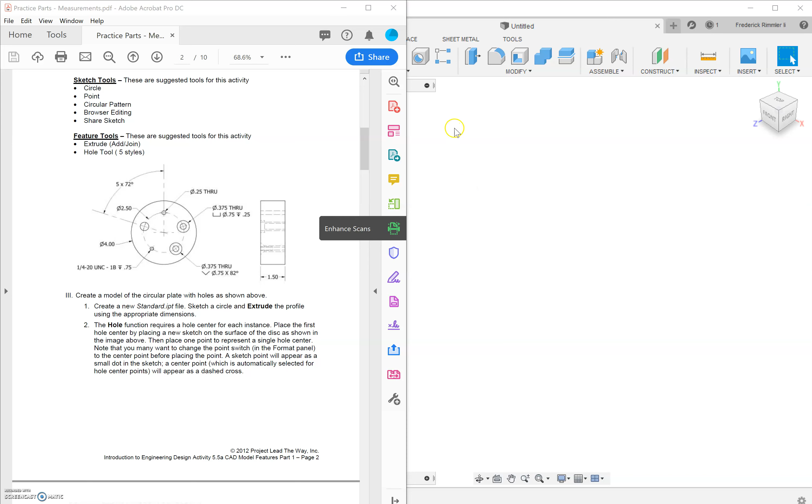All right, today we're going to make our first two parts that use the circular pattern tool. The first of which is this part that we will call 5 holes that uses 5 holes along a circular pattern. The first thing we need to do, as always, is create our new component.

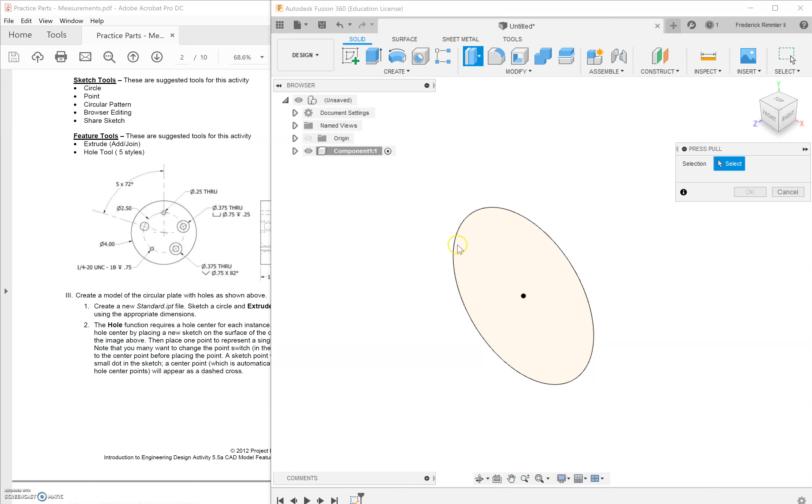Now we just need a metal disc to drill these holes into. So I'm going to start a new sketch, use our circle tool, and make a 4-inch diameter circle. I'll finish sketch, and press pull this guy, make him 1.5 inches thick.

Now the next thing we need to do is add points to mark off where we want our holes to go. So I'm going to create a sketch on top of this disc, and if I click the arrow next to create, I can go down and select point. This allows me to mark off locations.

I'm going to put one straight up from my origin, and then dimension that point 1.25 inches out. The circle, if you look here on the left, has a 2.5 inch diameter. Since we are measuring the radius from the middle, it will just be half that.

Now, rather than draw all 5 points and try to line them up perfectly, we can use a new tool in the Create panel called Circular Pattern.

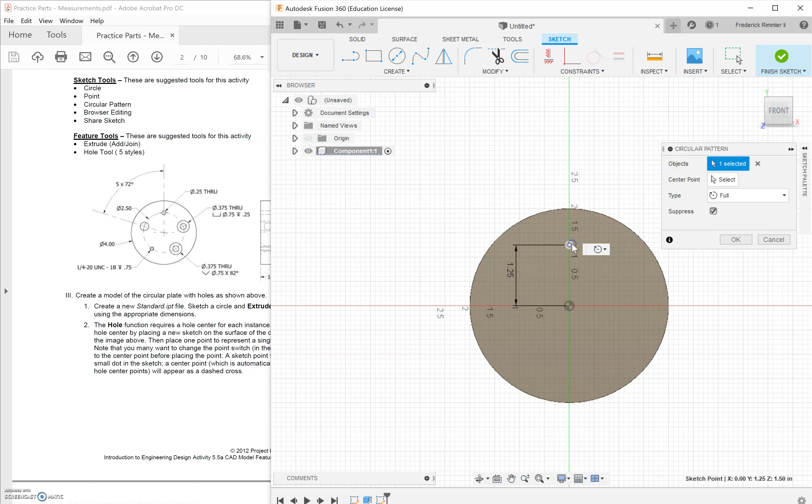With Circular Pattern, I can select the object I want to pattern. In this case, I'll click the point. You can see it says one selected. Now I'll click center point and click my origin, which will be the middle of that circle. And you can see it's created 3 of them by default.

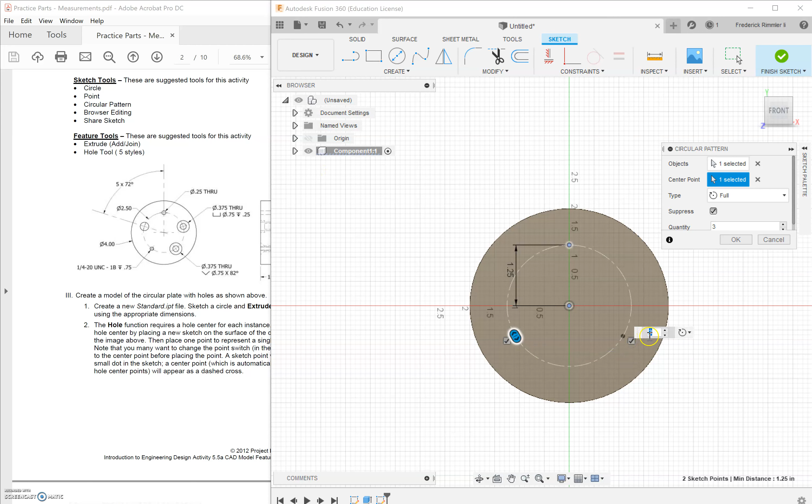I could create 3, I could create 30. I could even go through and check and uncheck specific points to turn them on and off. In this case, I just want 5 points, and I'll click OK.

Now I can finish sketch and come up here to use the hole tool. The hole tool is used whenever we want to make a hole designed for a screw to fit in.

If you're just making a standard circular hole or rectangular hole, I recommend just starting a new sketch, drawing the shape, and press pulling it through. But if you're making a hole specifically designed to fit a screw, then you're probably going to want to use the hole tool. So I'll click the hole tool.

The first thing I need to do is select my point for my first hole. And now you can see I've got a whole bunch of options here. The options over here on the left should sync up relatively well here on the right, although they're a little bit rearranged. For instance, here it's referred to as termination.

Over here we have extents, and that's how deep this hole goes. For our first hole, our termination is through all, so I'm going to change our extent to all. We've got a simple hole, which is that first symbol here. We have simple hole tap, which just means nice smooth sides, which is that symbol here.

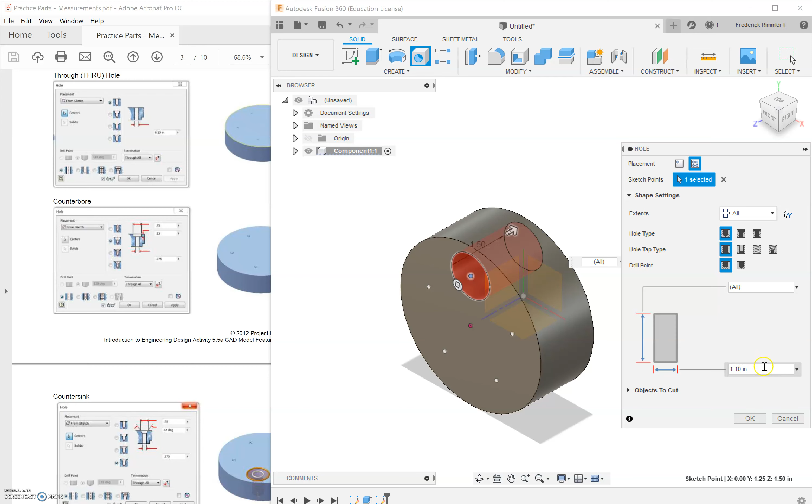And that's it. Time to make hole number 2. But before we can make hole number 2, we have to bring back those 5 dots. So in order to bring back those 5 dots, I'm going to come here to my browser, click the arrow next to component, and I can find my sketches down here.

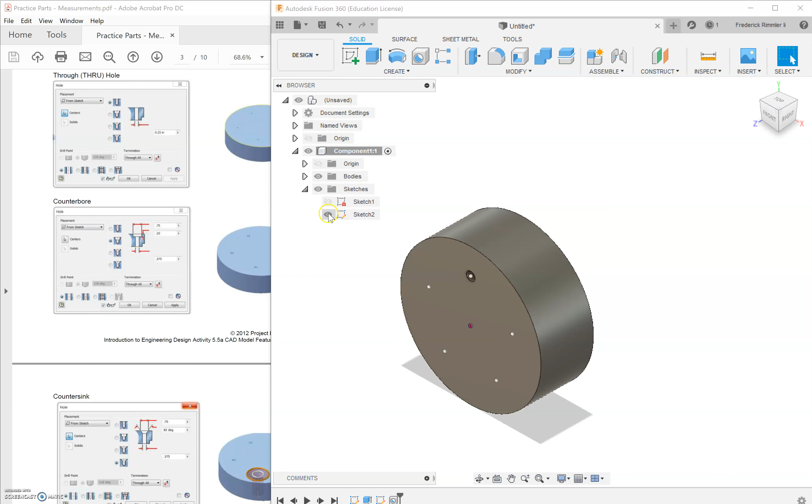Fusion 360 operates on a one and done mentality. If you make a sketch and use the sketch, it automatically hides the sketch, figuring you're done with it. But we can go back and just click this little eye next to sketch 2, and that will bring back the sketch with those 5 points.

I'll click hole and pick my second point. Now if we look at our second hole, that's a counter bore hole. Our termination is through all, so I'm going to change my extent to all.

For hole type, I'm going to pick the second one, counter bore. A counter bore hole has a wider top to the hole. It's designed so that when you're screwing in a button head screw, a nut, a bolt, it can be recessed down into the part, giving you a nice smooth surface.

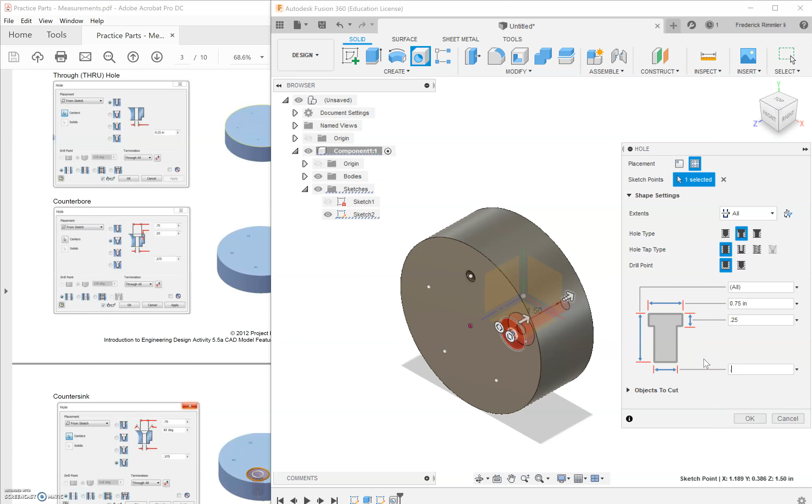My counterbore width is 0.75, counterbore depth 0.25. So 0.75 and 0.25. And then my hole diameter, 0.375. Click OK. And you can see this counterbore hole gets wider at the top in order to accommodate a nut, a bolt, a screw head.

For our third hole, we're going to do a countersink hole. A countersink hole is very similar to a counterbore hole, except instead of a rectangular top, it has an angled top designed to hold screw heads.

Again, the objective behind it is so that the screws will go down into the part, leaving a nice smooth surface. We can see our termination is through all. Our hole type will be countersink. Simple hole tap, flat drill point.

We can see up top our countersink diameter is 0.75 inches. Our countersink angle is 82 degrees, and our hole diameter is 0.375 inches.

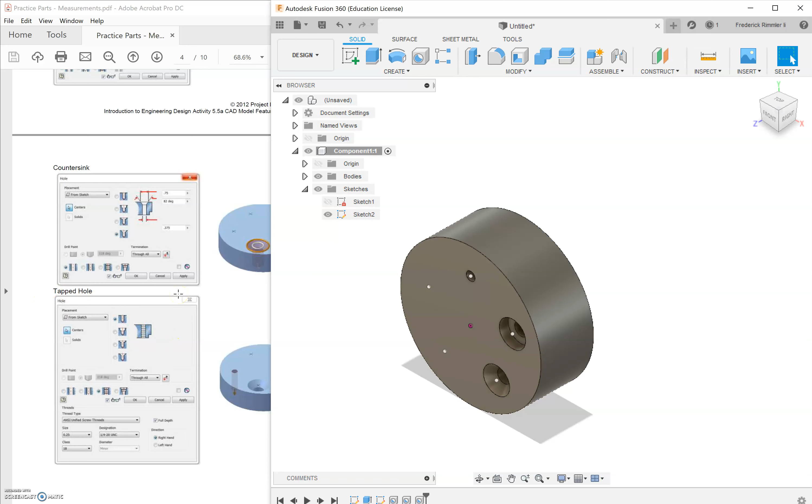Our fourth hole is a tapped hole. A tapped hole is designed to have threads cut into it so that you can screw a bolt or a screw directly into the part.

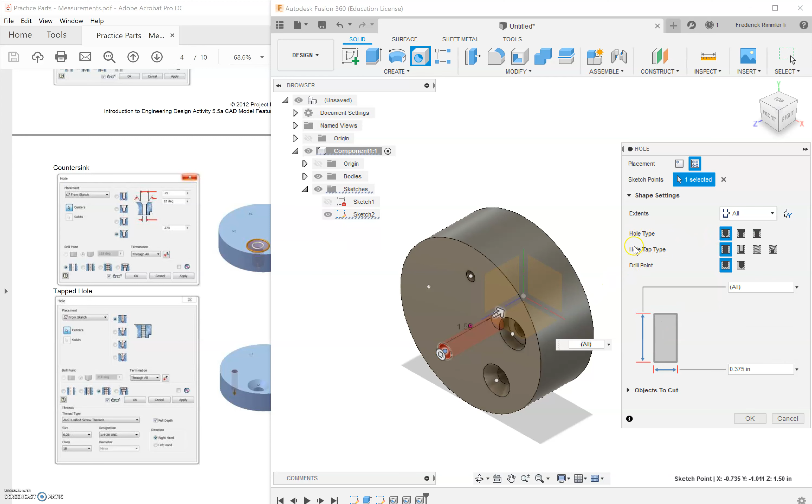So I'm going to go to hole. Looks like my termination is through all again, and I'll pick my point. Hole type, I'm going to go back just to a simple hole, but now where it says hole tap type, I'm going to click the third one, tapped.

Now I can come down here, and what we want to do is match the screw settings. Fusion 360 has a content library with thousands of different types of nuts, bolts, and screws. All you have to do is pick the specific screw you want, and it'll automatically pull the measurements. So we've got ANSI unified screw threads. Our size is 0.25.

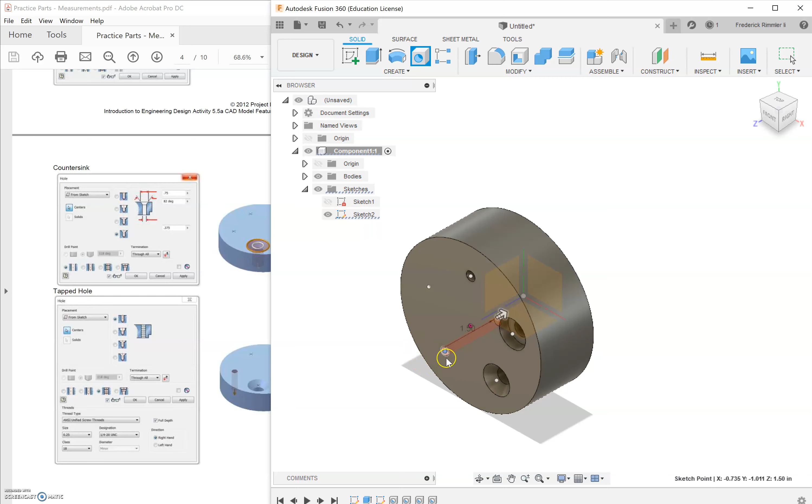Designation, 1/4 inch 20 UNC. Class 1B, and right-handed. Now, if I click OK, it will pull up that information, and you can see right now it just draws a spiral on the inside so that we know that it's threaded.

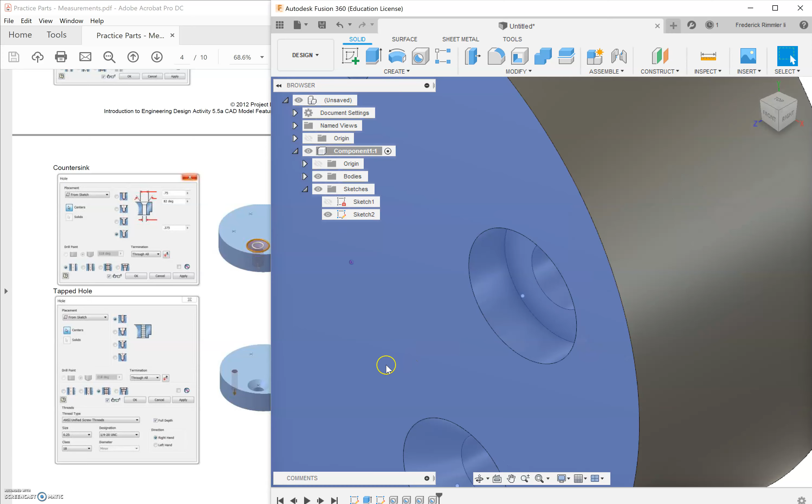You also have the option of clicking modeled, and now instead of drawing that, it will actually carve the threads into the model. This would be useful if you're going to 3D print this part, in which case it would 3D print the threads as opposed to just showing the threads.

Our final hole is a clearance hole. This is a larger hole designed to fit a screw head when two parts will be connected together, or you have to screw one part through another part.

So I'm going to click hole, click my fifth point, termination through all, simple hole type, except now we want a clearance hole tap type. And again, all we have to do is pick what size screw or what size bolt we want it to be able to fit. In this case, we want ANSI unified screw threads.

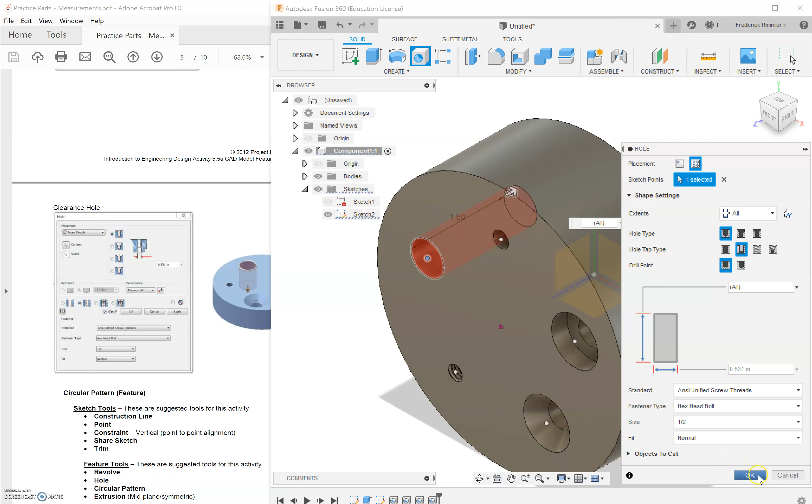We want a hex head bolt. Our size is 1/2 inch, and our fit is normal. Click OK, and now we have our clearance hole.

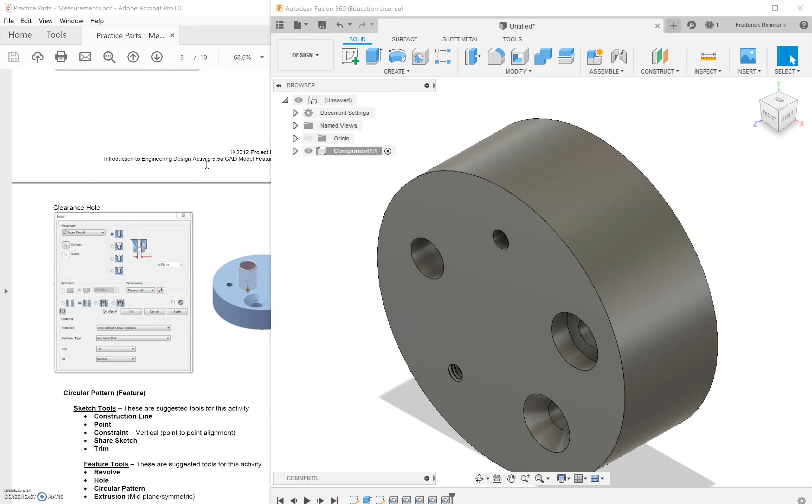The final thing to do on this sketch, now that we are done with our 5 points, I'm going to come to Sketch 2 in the browser and click the eyeball to turn that sketch's visibility back off. And that is the 5 holes part.

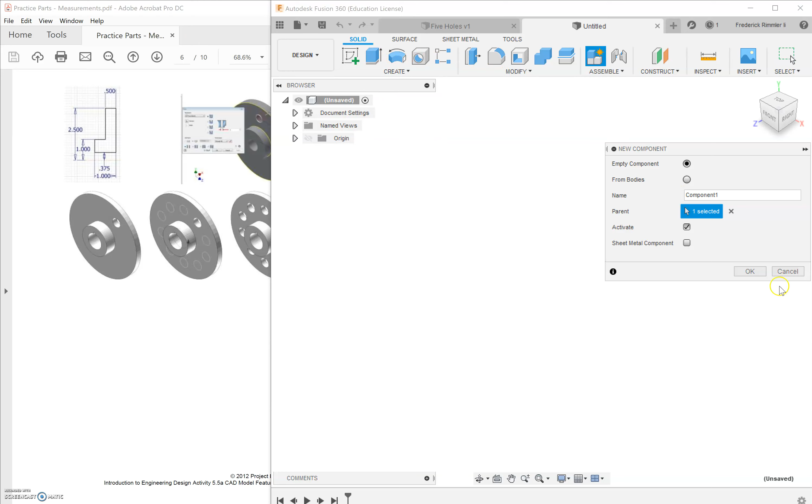The next part we're going to make is a nice quick one, and that is this disc brake right here. It too uses circular pattern, but it also incorporates revolve. So I'm going to create my new component, create a sketch. Now the interesting thing with this sketch is we don't start at the origin.

I'm going to draw my shape floating up into the air here. The reason for that is when we want a circle, we want a hole right in the middle. So this way, when we revolve the shape, it'll also leave that gap there for us.

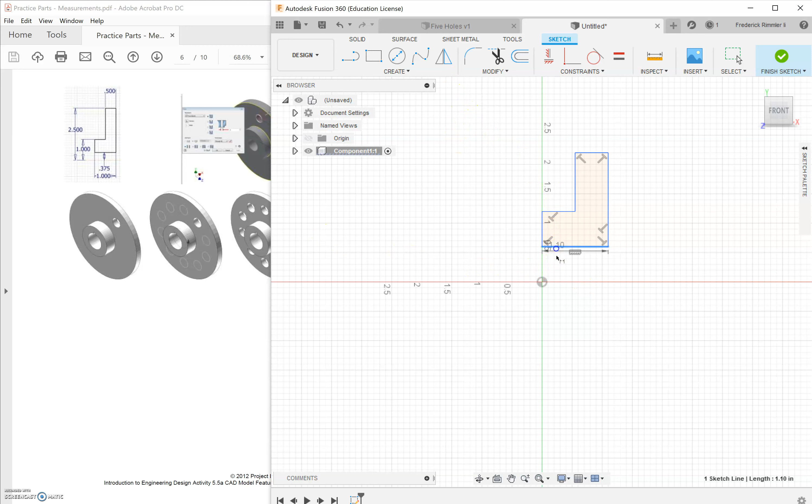When we come to dimension, looking at that sketch, we can see that all of our heights are measured from the origin itself. So origin to this line is 1 inch, origin to the top, 2.5 inches. We've got a width of 1 inch, and then our upper width is 0.5 inches.

Now you can see my part is still blue. That's because it can still slide back and forth because we didn't start at the origin. So what I'm going to do is come up to my constraints and use a vertical constraint and say that this point and my origin have to line up straight up and down.

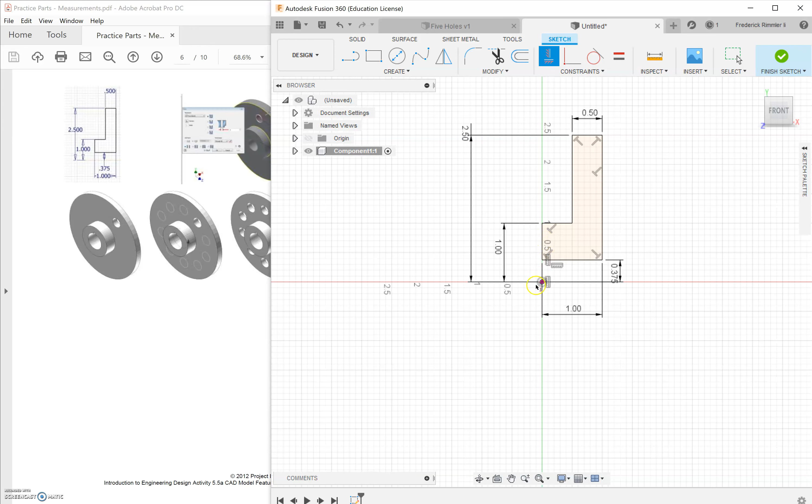Now I can finish, go to revolve, and I'm going to pick this axis. And you can see as I revolve it, it automatically revolves that hole in the middle as well.

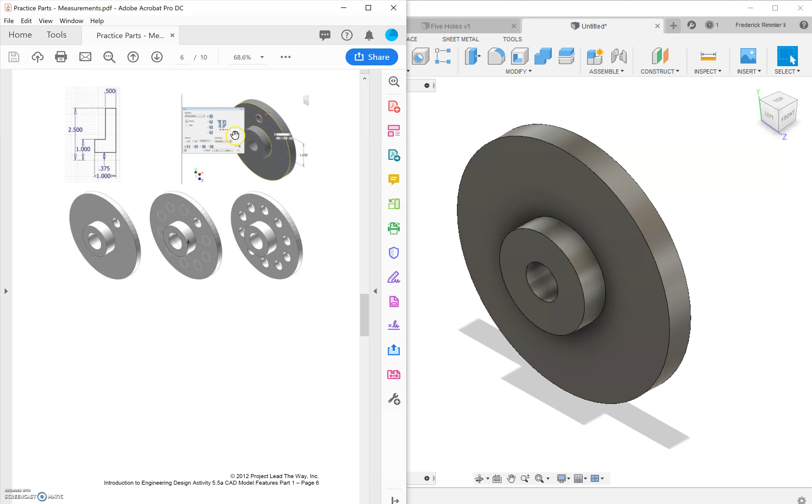Now we need to add these circles here. It's kind of hard to see, but the distance from the center is 1.65 inches, and we're going to go with a 1/2 inch diameter for the hole.

So I'm going to create a new sketch on top, and I'm just going to put a point that I'll dimension 1.65 inches out. Now we could finish sketch and use the hole tool, but since this hole is just a simple circle, I'm just going to sketch a circle right onto that point. 0.5 inch diameter circle.

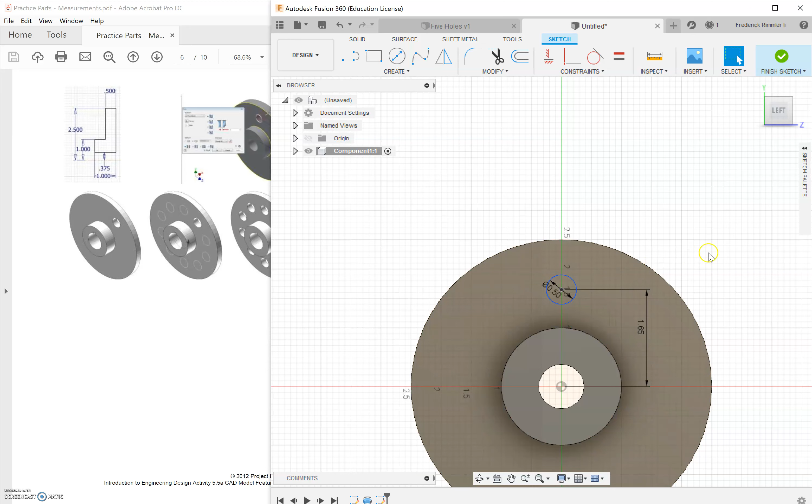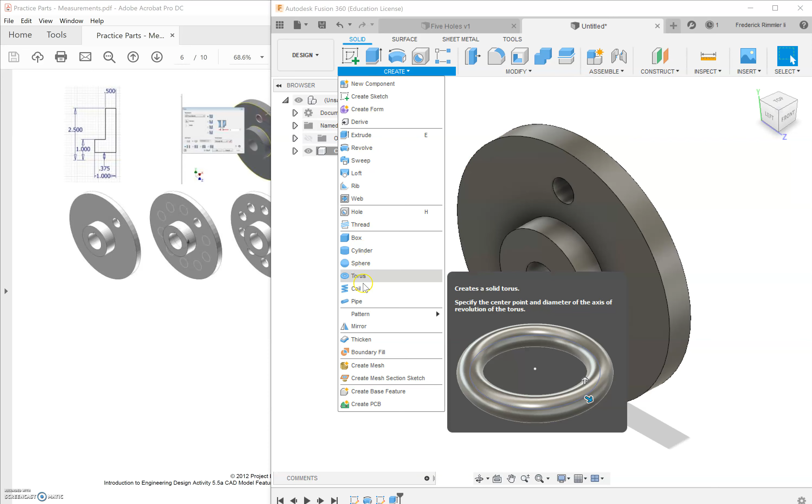Finish, and I will press pull this guy through the bottom. Now, to create all 10 of these circles, just like with the points on the 5 holes project, I'm going to click create. I'm going to come down here to pattern, and I'm going to pick circular pattern.

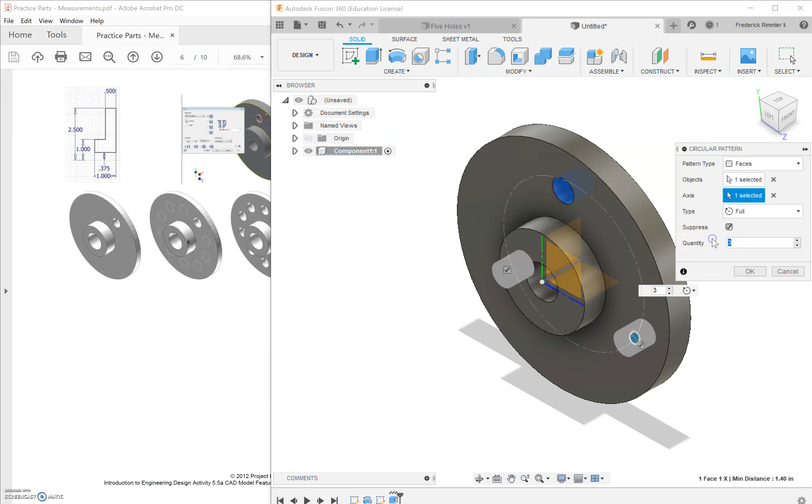The object that I want to pattern is this hole. My axis, so the middle of the pattern, I'll just pick the middle of the circle right here. And our quantity is 10. We do that, and we now have the holes for this disc brake.

The final thing is there is a little groove cut to fit what is called key stock. That's actually what locks the disc brake and the axle together. So I'm going to create a final sketch on top here.

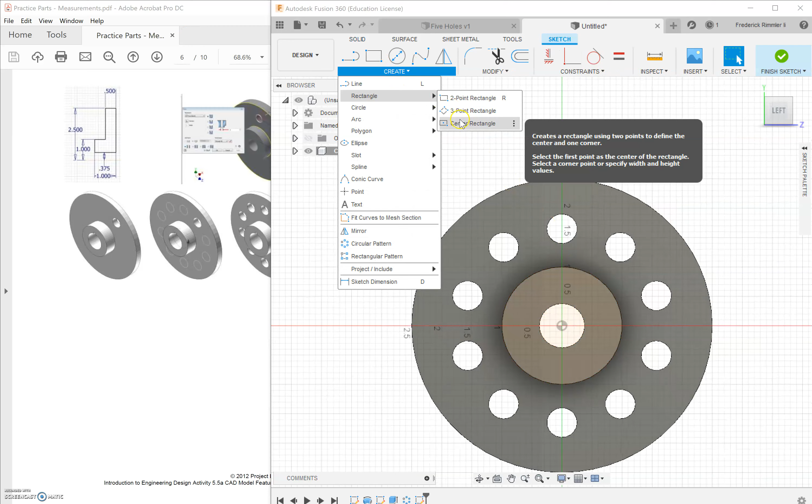Under my create rectangle, I'm going to go with a center rectangle. And right here, I'm just going to draw out a rectangle and make it 0.125 by 0.125 inches. Now I do want to get it lined up right above the middle, so I'm going to come back to my horizontal vertical constraint and make the middle of that rectangle straight up from my origin.

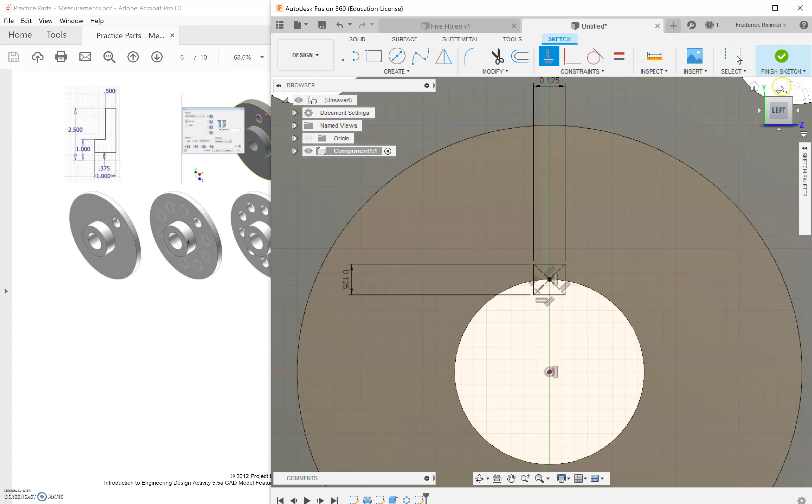Finish. Go to a nice isometric view. And now I can just press pull this guy through to make the cut for that key stock. We'll go ahead and save this part as disc brake.